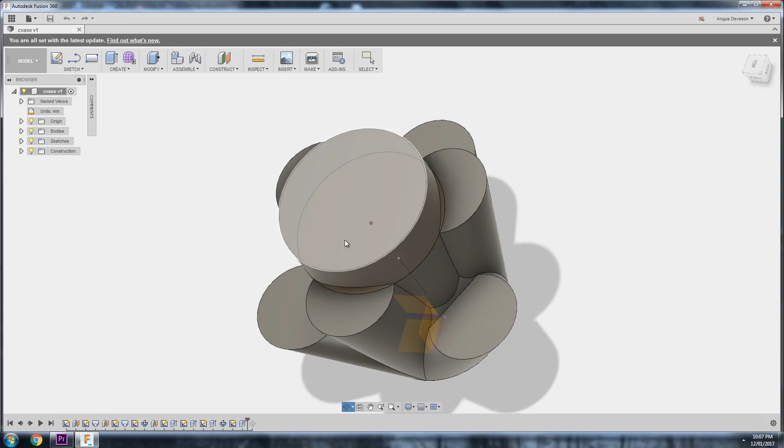So, as some of you may know, I like to create 3D printing pots. I've done them quite a few times in the past, and often I'll give them to my mum, who likes to put stuff in them, and then she gives them back to me. It's gorgeous. But the idea came across to me that a lot of files online actually could be adapted into pots for pot plants quite easily using Meshmixer.

I've been using Meshmixer for years now, and it's got some really sophisticated mesh editing tools that you can use to create these pots. But there's a few different methods you can apply, so I decided to make a video showing 3 different techniques that I use in Meshmixer to convert pretty much any 3D printable STL file out there into a pot you can use for your pot plants, or also for any sort of container you might like to put anything you like in, like candy or stocking stuffers, whatever. Let's get into the video.

Alright guys, so let's jump right into it. So what I've got here is Meshmixer fired up with the Stanford Bunny. This file has been around forever, absolutely ever, and we're going to be using this to create our first pot.

So, before we do anything to the file, you need to ask yourself these questions. What are you looking to put into your pot? How large do you want your pot? How thick do you want the walls to be? And probably want to note how big your printer is to actually justify how large you can print. Some people have little printers, can't print very large. Some people have massive machines like the CR10, and you can print pretty big.

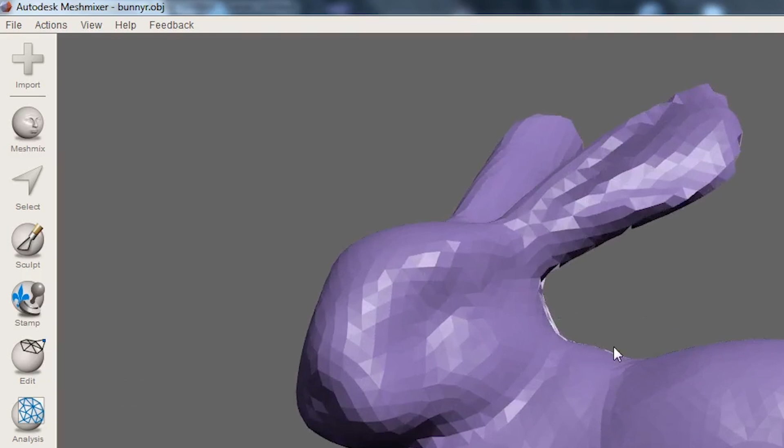First, we need to define our scale. So let's go to Analysis and Units and Dimensions. So this bunny is 50 millimeters high. That's a little bit too small. I've got a pair of calipers here just to help me judge distances. You could use a ruler as well. That's probably more logical. I'm thinking 120 millimeters high for my bunny.

So I'm going to change the 50 to 120. And it updates. Nothing really changes because we're just changing the units of the file. It's not going to suddenly look bigger, but it is bigger, 120 millimeters there. And done. And also something to note with this version in Meshmixer is it's a non-manifold mesh. There's a big hole in its butt. So let's fix that as well.

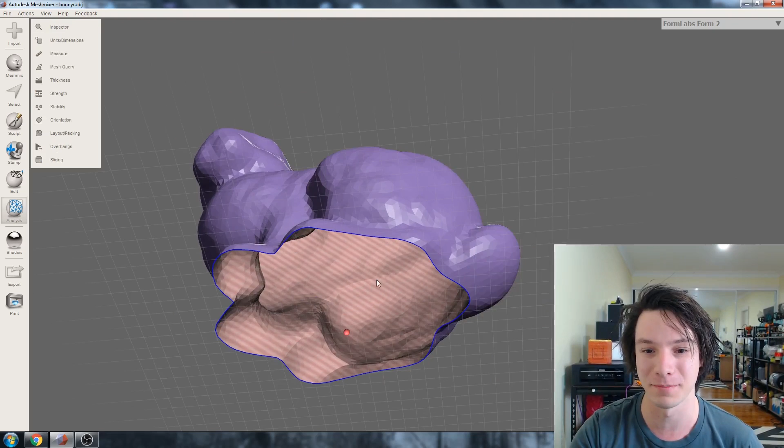Let's go to Inspector, and Inspector will show any errors in the mesh and auto repair, and it just caps it off. Okay, so we've got our bunny, and it's the right size, but if you printed this, as you guys probably know, it's going to print solid. So how do you make it like this? Well, the first version is to use the hollowing command.

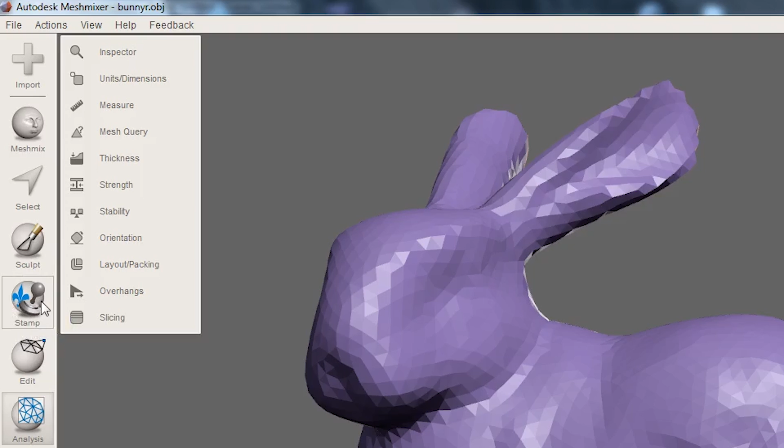So hollowing is what you do for resin 3D printing. You hollow out the print, so you save resin. You don't want to print solid with like a SLA or DLP, like the Wanhao Duplicator 7. I've actually got a whole video on doing it for resin printers, by the way. But to do that in Meshmixer, you go to Edit and Hollow.

And this is where we're going to define our wall thickness, how thick you want the wall of your pot to be. So by default, it's at 2, and to be completely honest, that's probably fine for me. Because you're filling this with soil, it puts static pressure against the walls of the file, and you can actually print in Vase mode as well, which is another method I'll show later in this video. But for this, 2 is totally fine. Actually, you can probably even go to 1.5, to be completely honest.

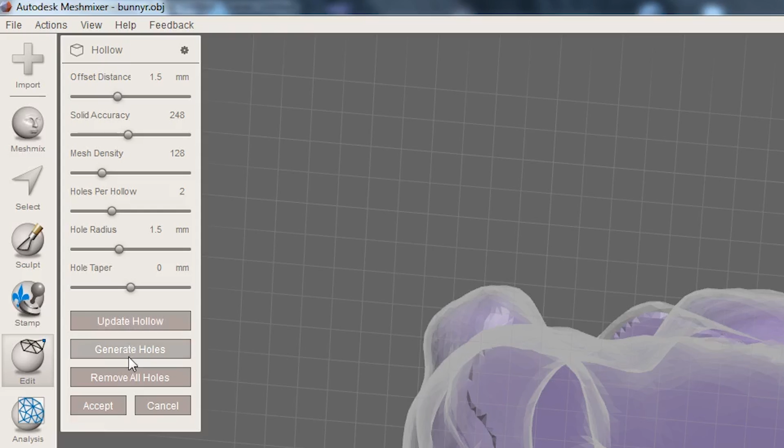1.5, update. And the really cool thing about using the hollow function in Meshmixer is you can add in drain holes. So we can generate some holes, and we can put a hole there, and a hole there, and we can enter a large size, so let's go with 10. They're probably a bit big. Let's go with 6. Alright, got 2 drain holes there.

And if you're finding you've got a really complicated STL file, you might want to change your solid accuracy or mesh density, but for this it's totally fine. The higher mesh density and higher accuracy, obviously the more polygons and the more computational power it takes to resolve.

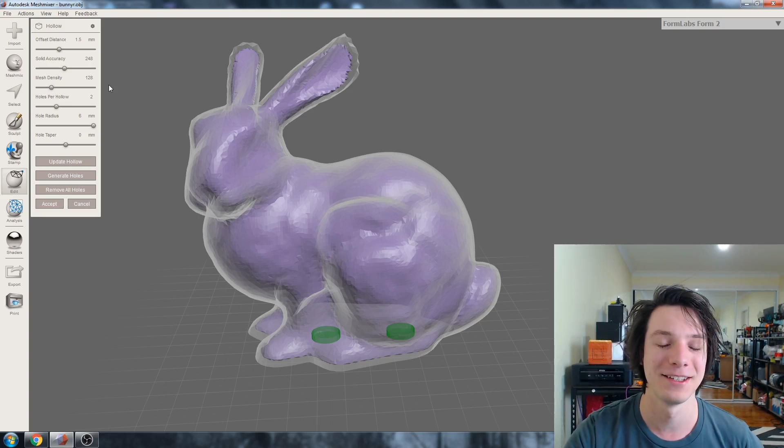But we go to this and accept. Sweet. Okay, so I've got our bunny, and it's actually hollow. If I went to do a plane cut, you can see here, it's hollow. But how do we get this sort of shape?

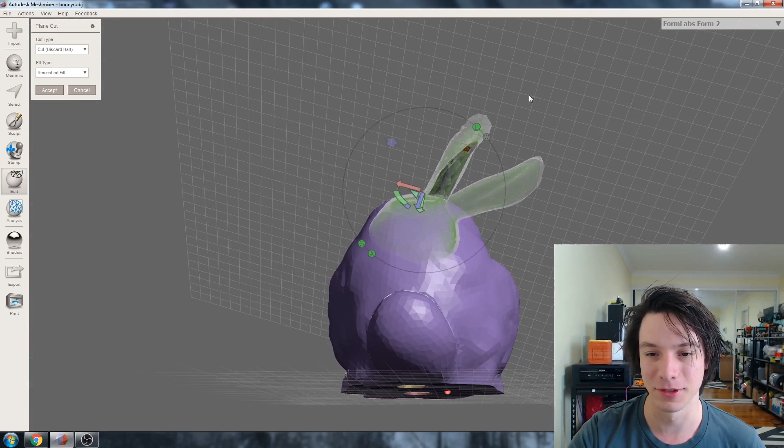So as you can see with plane cut, that's how most people normally do it. You can plane cut and leave a void, and then that's where you could put stuff in. But I want to put stuff here in its back. I don't want to plane cut it kind of like that. It might work for some models where you just want to cut the top off, but for this, no, let's not do that. So what I'm going to do is called a Boolean difference.

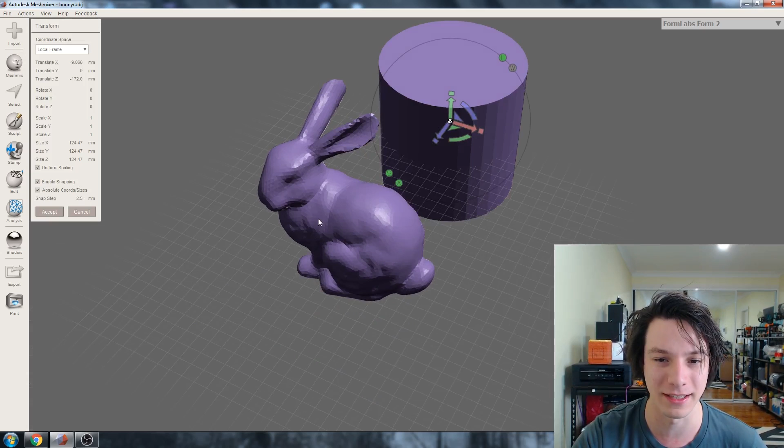So a Boolean difference takes a different model, a different mesh, and subtracts it away from another mesh. So we're going to go to Meshmix, and let's grab a... It really doesn't matter for your model. Just choose one that the shape makes sense for what you're doing. For me, I kind of want a cylinder like this, and I'll just stretch it and adapt it to make sense. That sentence made no sense. What I'm saying is you can grab any shape you want to do a Boolean difference.

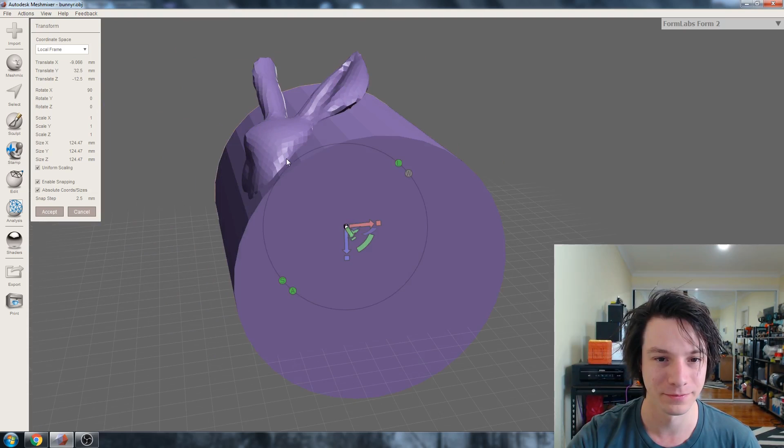There we go. Okay, so we've got our cylinder. I'm going to rotate it around 90 degrees. Move it up, move it across, and then scaling's completely wrong, so let's change the scaling. I'm going to do it non-uniformly, so I'm going to just drag it from these points. This is going to start squishing it, which is fine. I don't really care about it being uniform. That's uniform, by the way, from the center. Move it up and across.

And as you can see, this is pretty tedious. This is the most tedious aspect of this technique anyway. But that looks pretty good. It's kind of intersecting its back there. It's got a little shape there. It's not touching the ears. I'm okay with that. Accept.

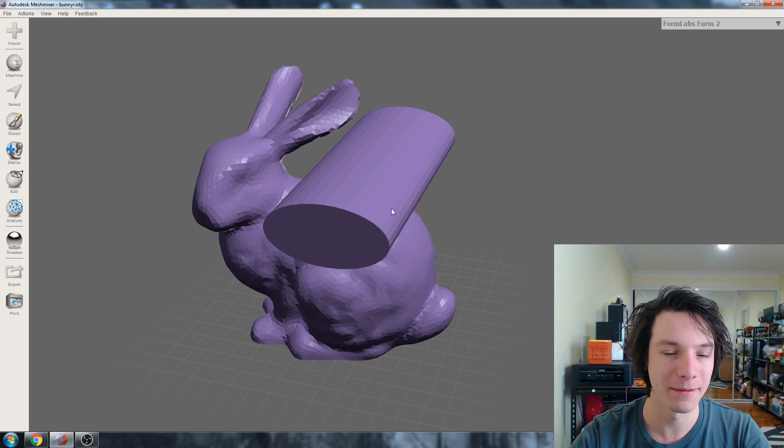Alright. I'm just going to change the colors quickly under shaders. I'm just going to drop in different shaders. For some reason, those colors don't show the selections very well. The purple. I like the purple, but it doesn't show selection very well. So if you want to change the color of your mesh in Meshmixer, you can do it through the shaders here. But now going back to the standard gray.

So to do a Boolean difference, you select your master, and then you select the tool, the one that will cut away, and then you do a Boolean difference. And there we go. So what that's done is it's cut away our cylinder from the original bunny mesh, and because we did hollow it out, it's got a nice hollow there.

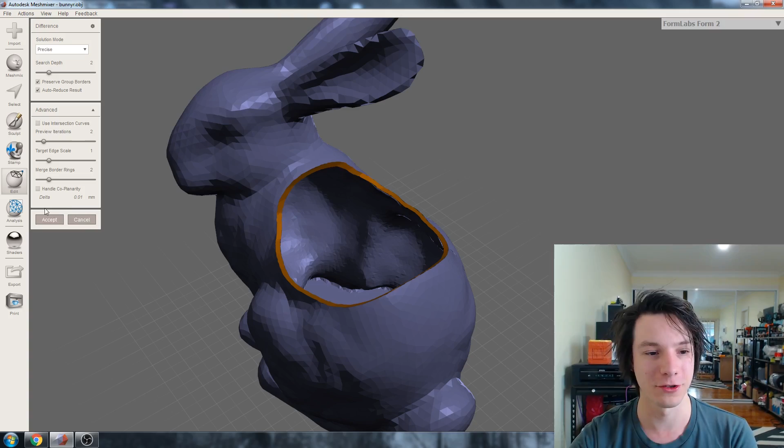Some of you might also notice that when you tick the auto reduce result, sometimes things break. So I'm going to just try it with it ticked. That looks fine. W for wireframe. If it does break in your model, untick that. Just means there's more triangles. It's not a bad thing. It might make it resolve in your case. But that actually looks really clean. That actually looks really good.

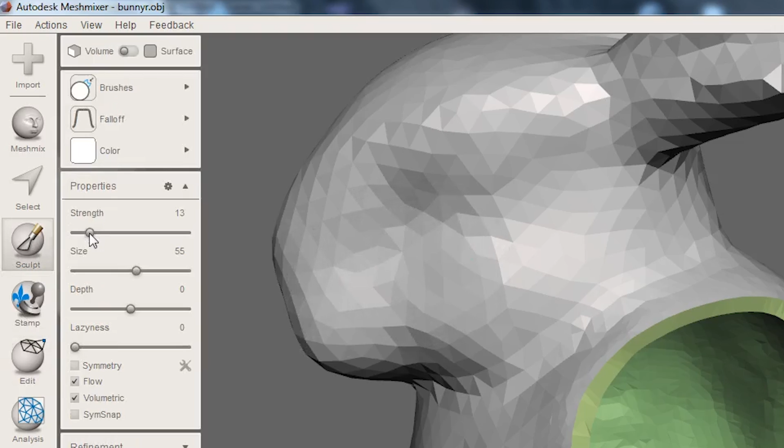But if you do notice any stray craggy edges, or you want to make it a bit smoother, we can actually use the sculpt tool to start tidying it up a bit. So you can just go to sculpt, and we'll turn the strength and size down like that. And then for brushes, I'm going to select shrink smooth. So you can use different types of smoothing, bubble, shrink, robust. To be honest, in this circumstance, you're not going to see much difference. Shrink is probably what I want.

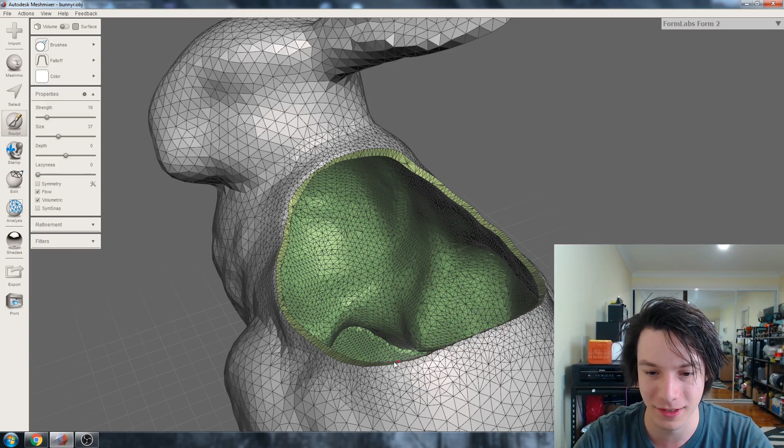Just sort of pulls it down to a smoother result, like that. And look, for this shape, it's probably doing more harm than good. But if yours has really sharp, craggy edges, you can use it to kind of remove those like that. Just don't go too thin, because remember, it's quite thin already. And that's going to do it for the first method of creating a pot out of the Stanford Bunny.

Okay, so let's fire up MyMiniFactory, which is a really good repository for STL files. And let's say I want to make something that's based off some old 3D scanned objects, something in their Scan the World initiative. Let's find that. So these are the files that are in the MyMiniFactory Scan the World category. I love the cat. I just don't know how you'd make a pot out of the Gayer-Anderson cat.

But one of the models I did find that looked really tempting was this, a wellhead. I don't know too much about the history of what wellheads were or are. I'm not a historian in the slightest, but it did look like a pretty neat pot.

And this particular one has a little bit of a story behind it. It says wellheads not only protected the mouth of the well, but also provided an opportunity to make public statements of allegiance, which is pretty neat. So you've got all these different markings on it to obviously state their allegiance.

And this is a 3D scan of a real wellhead. So we've got Meshmixer fired up again, and this is our wellhead. Yeah, it's definitely a 3D scan. It's really rough, but actually they've done a great job at stitching it together. You've got all these different textures and things, and you can see it's got this divot inside.

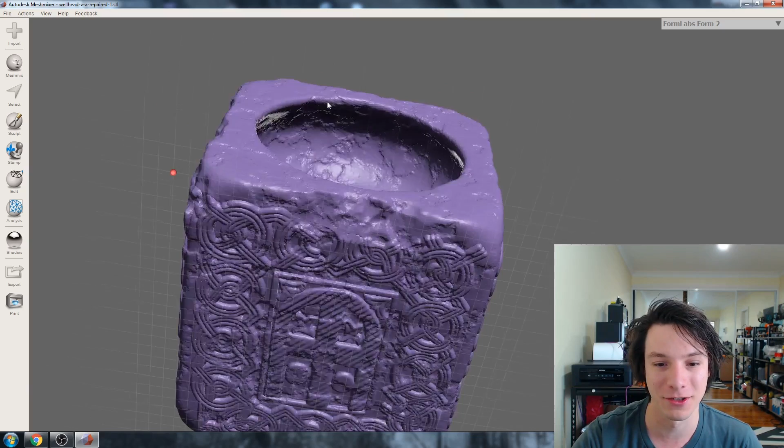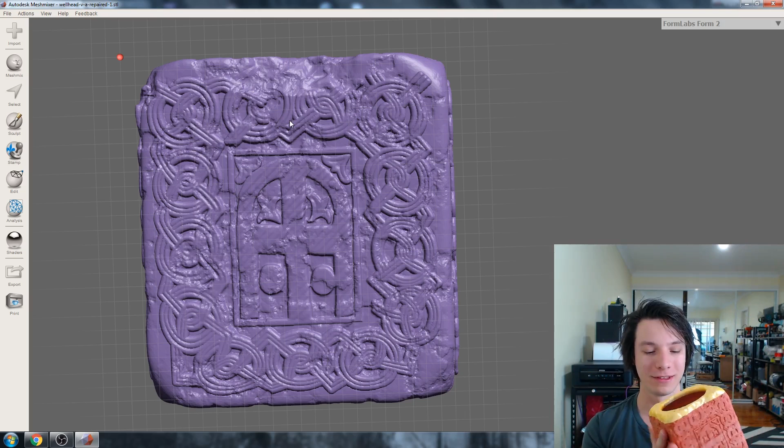But for our pot, if we were going to turn this into a pot, say in that orientation, if this was the side, we want it to be a bit deeper. So I'll show you how I did this. It's a different approach to doing the hollowing tool, which you probably could still do. In this case, I actually gave it a cylindrical hollow just below the lip here, so it still goes in a bit. I wasted a lot of filament though, this is like 1 kilo of material. So this method uses a lot more filament than doing the hollowing or vase mode method.

But anyway, that's cool. So first things first, this 3D scan's on its side. So I'm going to go to Edit and Transform and flip it around to 90 degrees. Now that's better. Accept, and we need a flat base to print it.

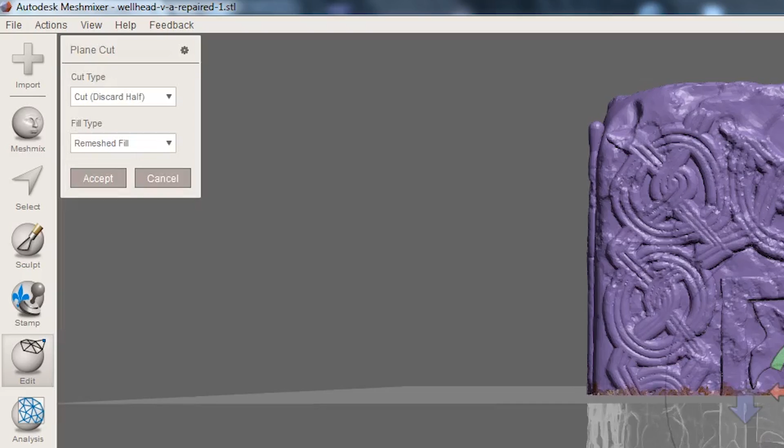Otherwise it's not going to print properly, so I'm also going to do a plane cut, and cut down here, just enough to start. That'll do, so I have a nice flat surface to start the print on, otherwise it's not going to be very stable with various tiny supports and things. That's not what we want.

So what we're going to do here is a face transform. We're going to select various faces on this inside area and transform them down, pull them down into the shape, and that's what's going to create our pot.

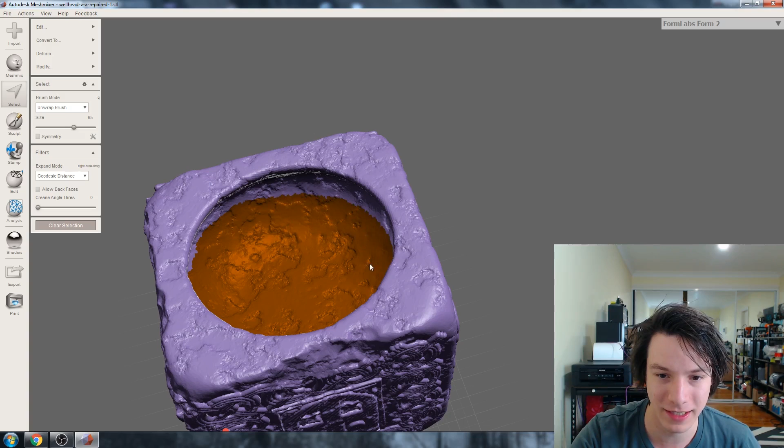So to select the faces we want, we're going to go to select, and I'm at the top down view, and you just want to select around all the faces, not selecting the top surface, we don't want that. Just select around all of those, and the middle ones as well. Then you can extend it as much as you like, just keeping in mind we're not going to select those top ones.

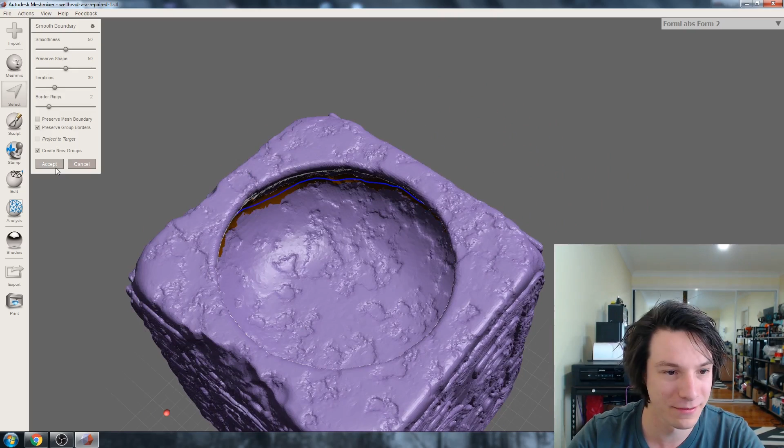Okay, so I've selected our triangles, as you can see here. I'll just hit W, it is a mesh file, so lots of triangles. And I'm going to do a modify and optimize boundary. So that's given us a nicer boundary there, and then we can also smooth it as well, so optimize and smooth boundary. There we go, that's given us a nice circle there to create our boundary, accept, and yeah, that looks quite good.

Okay, so just for future reference, you can also create a face group from this. So modify, create face group. So now if I want to go back to that, I can just double click it and it will select all those triangles. I'm just going to double click them again, selects that whole face group, and we're going to deform them, so let's do a transform.

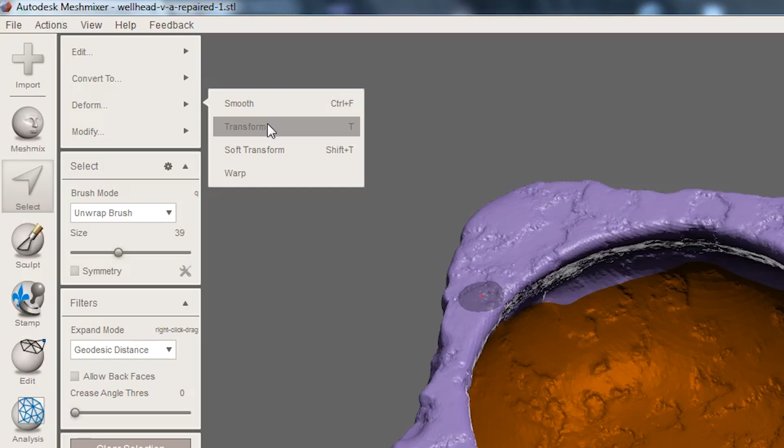Transform, and then transform down, down, down, down, like that. So what it's done is it's taken those faces and just pulled them down in space and added these new kind of janky looking joining faces.

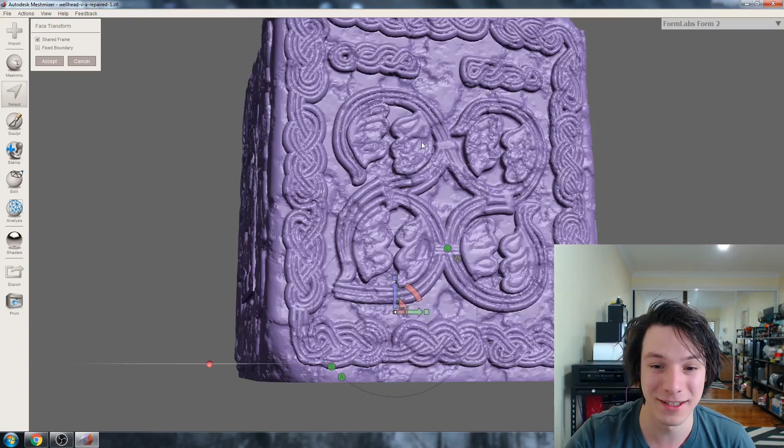But that's okay, it's still a legit mesh. You can pull it down as much as you want, but you can't go through the base, obviously. So I'm going to pull it down to that much. It is very difficult to tell how far you've gone, so just keep that in mind. I can see here what the grid is at that location, and I can see I've got the grid there, so it's very close to the bottom but not intersecting, which is what we want.

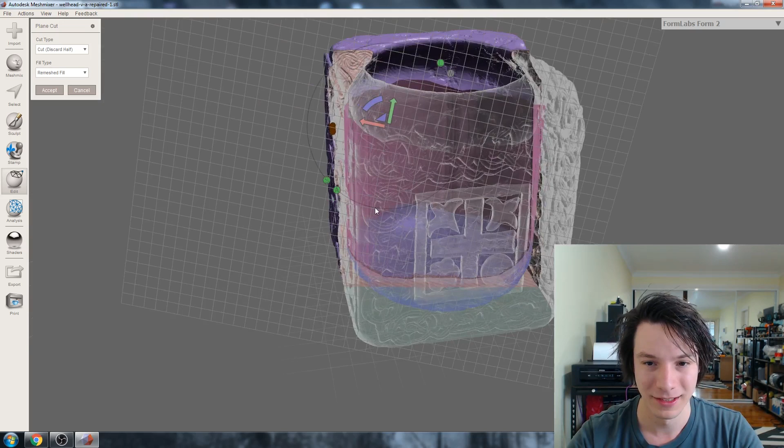And accept, let Meshmixer do its magic. Escape to clear selection, and there we go. So what we've done is we've taken this shape and pulled that surface down, so it still kind of looks like the original, but it's got this sort of joining face pulling it down. So let's do a plane cut to see what it looks like. Plane cut through, I'll just accept temporarily.

So here we've got the plane cut. Also, you can see some nasty mesh inaccuracies. That generally happens with scans, but that's okay. What we care about is that the base of our model is not too close, it goes down and doesn't intersect anywhere on the sides. Good, okay, undo that plane cut.

Cancel that. Okay, so we've got our pot, and as you would know if you've owned any pot plants, you need drainage holes, otherwise the plants will start rotting when it rains. So we're going to grab a cylinder, drop that in, change its size to maybe 6, accept, create new object, and we need to transform that so it's taller.

So grab this to pull it up, so we're just stretching it basically. You see it's now going through the base and the top, and accept. I'm going to turn on the navigation menu for the objects browser. So here we go, that's under View, Object Browser. So now we can see we've got our dropped part, our cylinder, and we can make copies of that.

So I'm just going to hit duplicate here, duplicate, and I'll just transform these. That one can be there, that's fine. This one can be kind of here. That's fine. And this one can be over here. You could be more precise with this, by all means, but I'm not being precise, but that's fine.

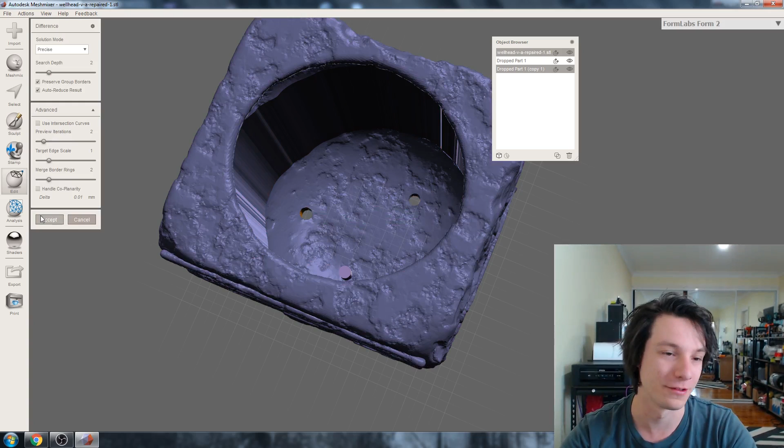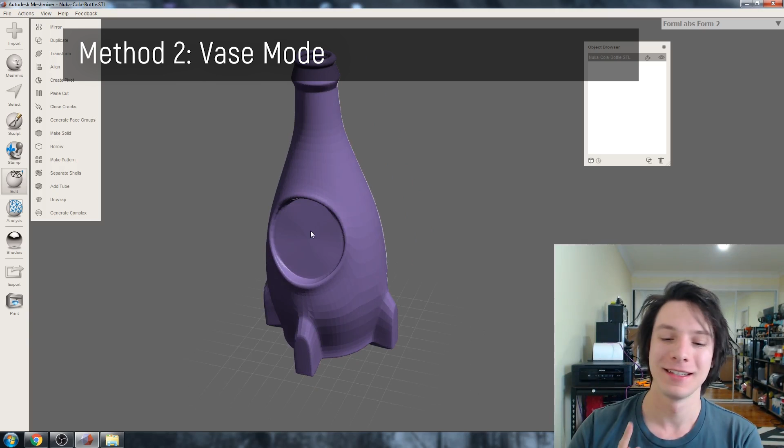Alrighty then. So this is going to be the last way that I use to make pot plants or containers of various kinds. This is the Nuka-Cola design from Mischief Company on My Mini Factory. It's pretty darn cool. And I'm going to horribly bastardize it by turning it also into a very small pot by cutting the top off, and we're going to design it.

We're going to make it designable for 3D printing with Vase mode. So at the moment, you can see he's designed these fins in at the stuff at the bottom. It looks really cool, but that means it's got these hollow details. It's not going to be printable in Vase mode, which is single perimeter, as it slowly goes up and up in the Z-axis. All right, so let's start cutting up this file.

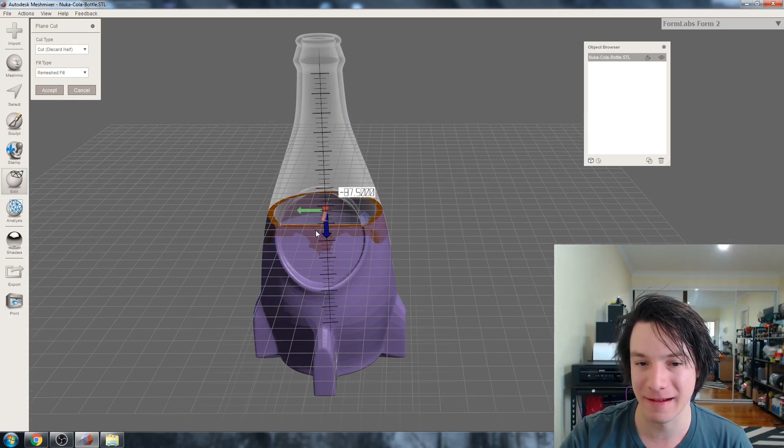So let's do plane cut. Flip the direction and choose where you want the height of the pot to be. I don't really care. Let's go with that, and let's go with no fill.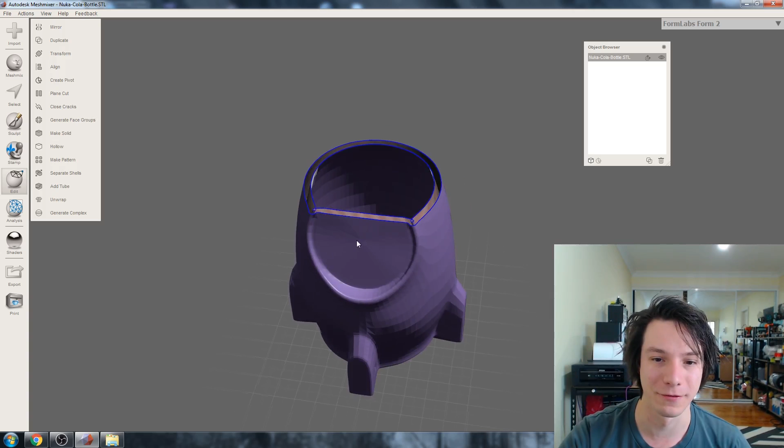It's going to be a very small... yeah, let's go up there. It's going to be a very small plant. There we go. Also, I'm not doing any scaling yet. You don't need to do scaling in this method, because Vase mode doesn't really care. We can do scaling later on. That's fine. So we've got this cut here, no fill, and got some crazy geometry stuff going on there.

All right, and we're going to do another cut. So plane cut, and the bottom. We need the bottom to be flat, otherwise we can't print it. So let's move it up to there. Yep, that'll be fine. And again, no fill, cut.

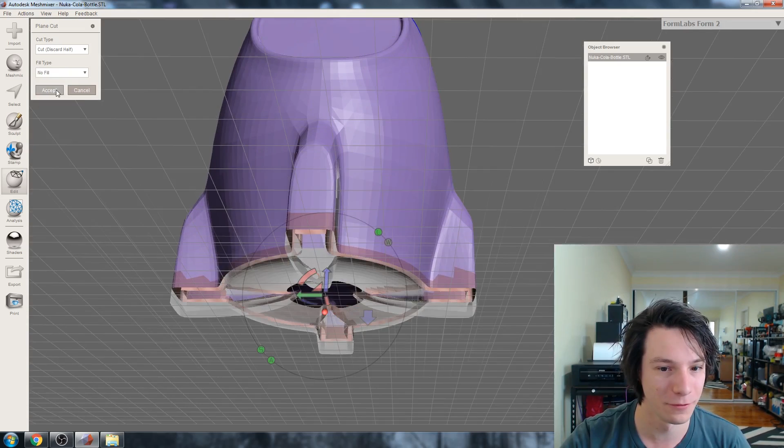All right, so what we've got is this crazy nastiness at the bottom and this crazy nastiness at the top. But if we go to separate shells, we've now got multiple shells. We've got the outside, the inside, and some other random stuff. So I'm just going to delete the inside. Delete. Oh, that's the other one. And this little random bit here. Delete. Okay, so that's gone now.

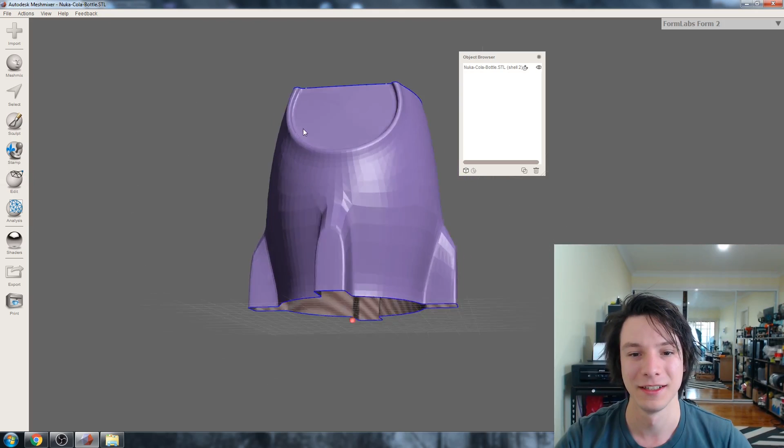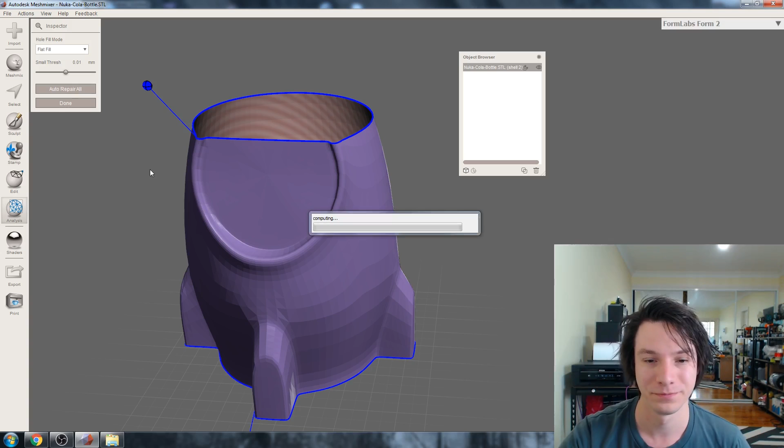So what we've got is just the outside shell of this part. Now, sometimes it's more difficult to do that, but in this case, the thin wall was easy to remove by just doing 2 plane cuts and turning remeshed fill off. So we've got our shape here, and really all we need to do now is go to Analysis and Inspector, and Automatic Flat Fill, Auto Repair All. And what this is going to do is take those outside boundaries and patch them up, just like that.

There you go. And finally, you could do this in your slicing software, but I'm just going to go to Units/Dimensions, and for the height, I'm just going to make it 150. Done. All right, and the final step, we'll need to jump into our software. So I'm going to jump into IdeaMaker for this. So I'm just going to save it as an STL file, export.

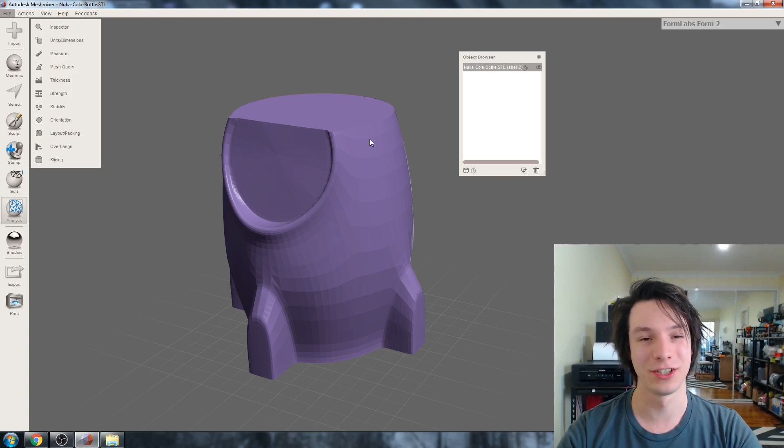Let this poor thing chug and chug and chug. I do need a new computer.

Here we go. So here's our Nuka-Cola pot. Yeah, it doesn't really look like a Nuka-Cola bottle anymore, but it does look Fallout-ish still.

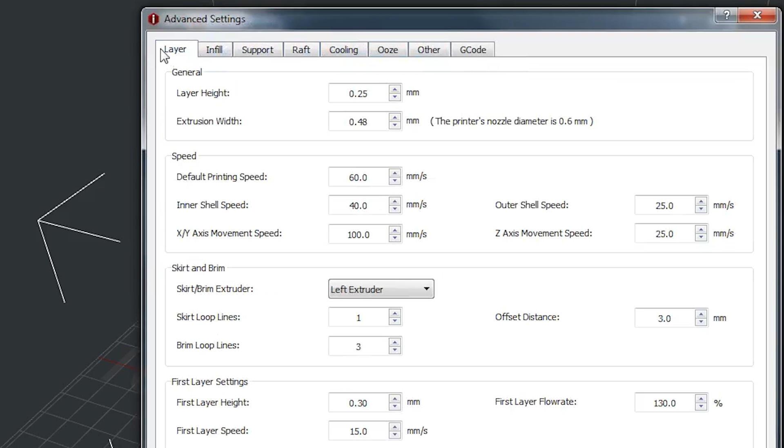Really neat. And basically, to print this in Vase mode, you go to Start, and let's just choose any random one. I do have a Vase mode setting automatically, but I'll show you how I did it. So Advanced - you basically need to go to the Other tab and check Spiral Vase mode. And then your layer height, whatever, change that to your preferences.

I don't want anything, no brim. Oh, I have a brim, that's fine. And yeah, save, whatever. And then slice. And it actually says, you have Vase mode on, do you want to still slice? Yes, I do. And let's give us a preview.

So this is the model sliced in Vase mode. So yeah, I can already see a few issues. To be honest, I should have seen that before. That flat spot there doesn't like being in Vase mode.

So it's going up nicely here. Make it full screen. And curving over - you do need subtle curves in Vase mode, that's the trick. So that bit is a subtle curve, and it comes up nicely.

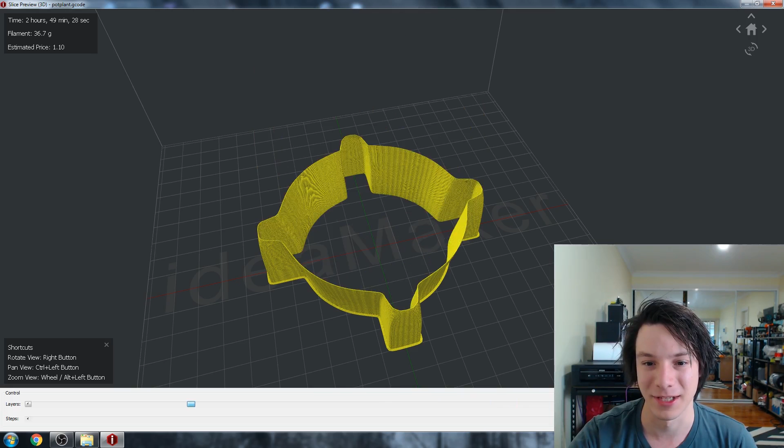What I could do is actually go back into Meshmixer. So to fix that area that's a bit nasty here, I'm just generating a face group with the right angles. That will do.

Except, so I can just select those triangles, and I'm going to just do a smooth transform. Yeah, I gotta smooth it out. Smoothing does make it look pretty good.

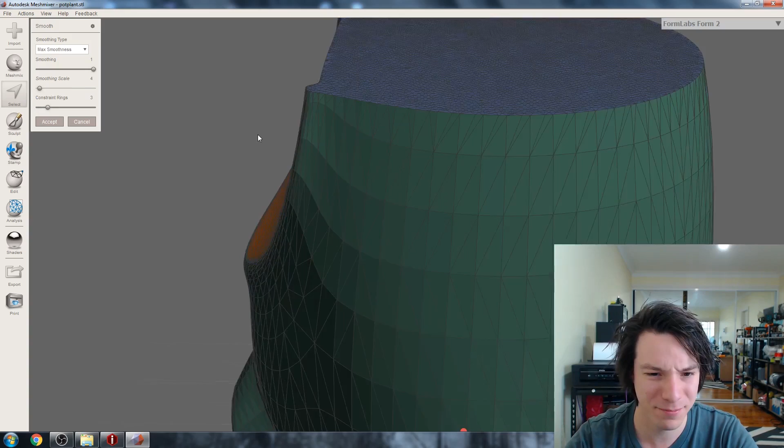So you can kind of remove that detail a little bit. That'll probably work. That's alright, let's do that. Clear selection. Okay, so it doesn't look as good as before, but it's sort of smoothed out a bit.

Any errors? Sometimes it introduces errors. No errors. Okay, and I'll export that out again.

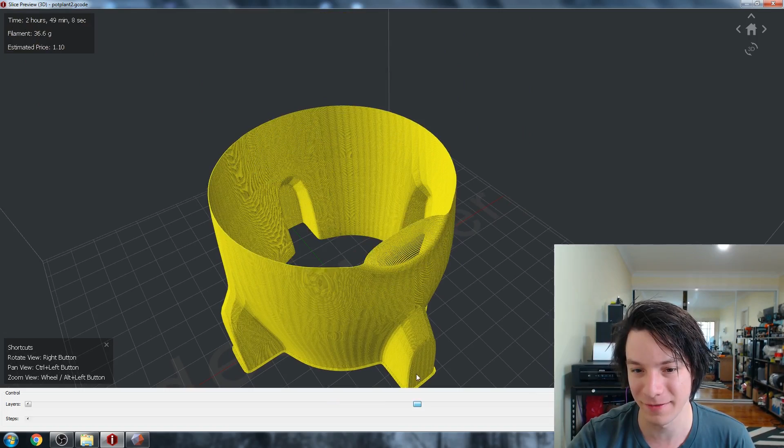Sweet, well here's our changed edited model, and yeah, it's much better this time. So depending on your layer height, it may still look a bit iffy there, but that's far improved. I've got this crazy line here as well, means it's not completely flat anymore, but whatever, that's not a big deal.

And that's how you can make a pot from pretty much any STL file using one of those three methods. And that's how it works, guys.

So here's the bunny printed out in Polymax PLA, and I haven't put anything in this one yet, but it would fit a nice little small succulent of some kind, or maybe even an air plant. You could do a really small one with an air plant. They don't need any soil. You just kind of glue them in place. But I'm really happy with this one.

So this is the wellhead with a zygo cactus. These sort of cacti have really nice flowers. This one's a bit worse for wear because we haven't had any rain for ages, and I've been out of town, so I haven't watered it for a little bit. But he'll bounce back, they're pretty darn resilient.

And it looks great. I mean, you've got the terracotta-like filament there with the gold as well. It actually ran out of filament, which is why I ended up doing that. There's a little bit of a split there with the PLA, but no big deal.